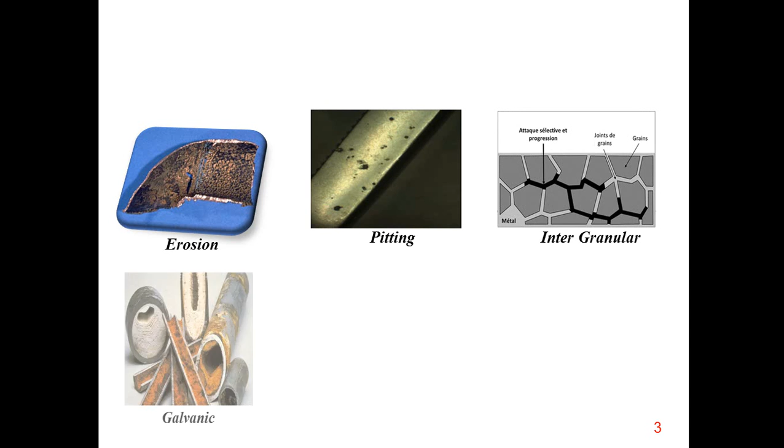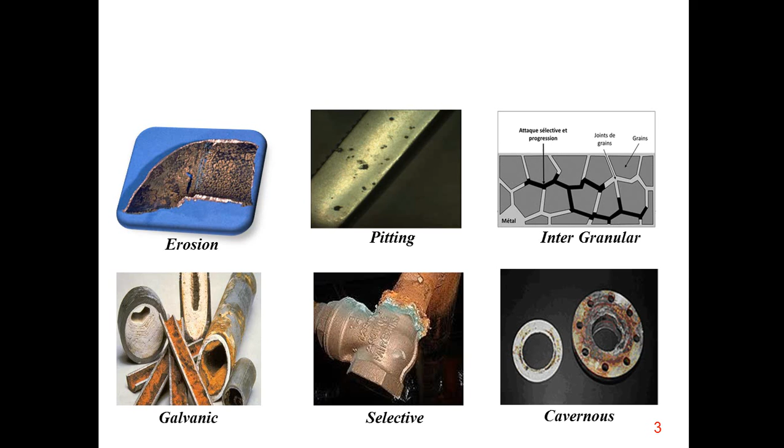Corrosion is an electrochemical process that takes place between metallic materials and environment, causing degradation of metals, which results in environment and process pollution, economic loss, and safety issues. Corrosion leads to serious problems such as changing physical appearance, mechanical properties, and resistance of materials.

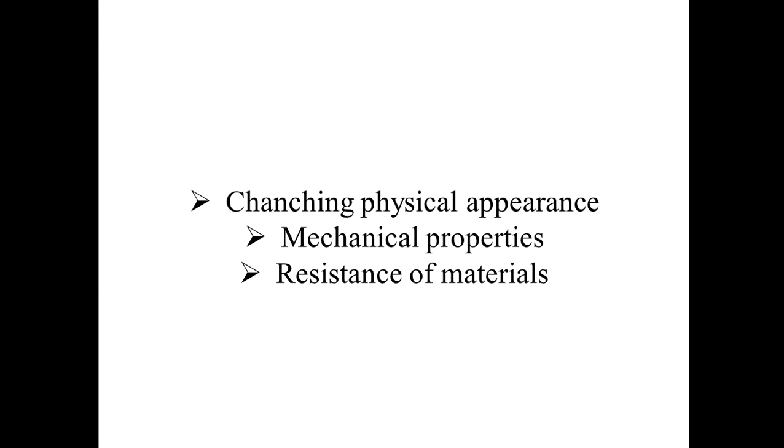One of the most affected metals by corrosion is mild steel or its alloys, which are the most important and widely used metals in various industrial and engineering applications due to their low cost, high ductility, malleability, good mechanical resistance, and easy availability.

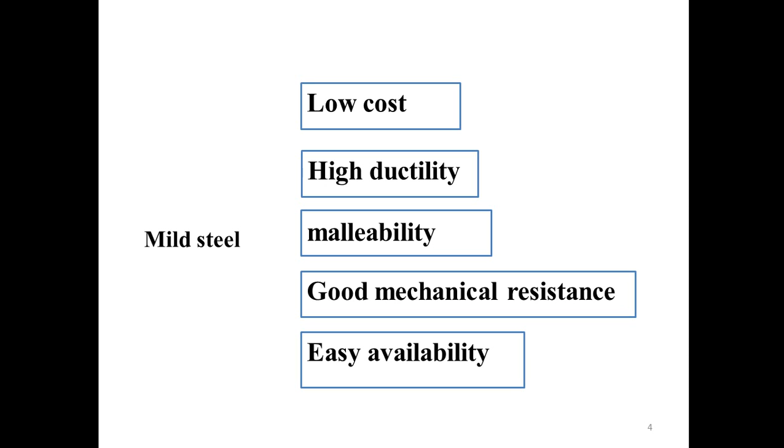Recently, corrosion protection studies have focused on the use of non-toxic and effective inhibitors, mostly called green corrosion inhibitors. Those inhibitors are generally obtained from natural products as extracts from leaves, seeds, heartwood, bark, fruits, and medicinal plants.

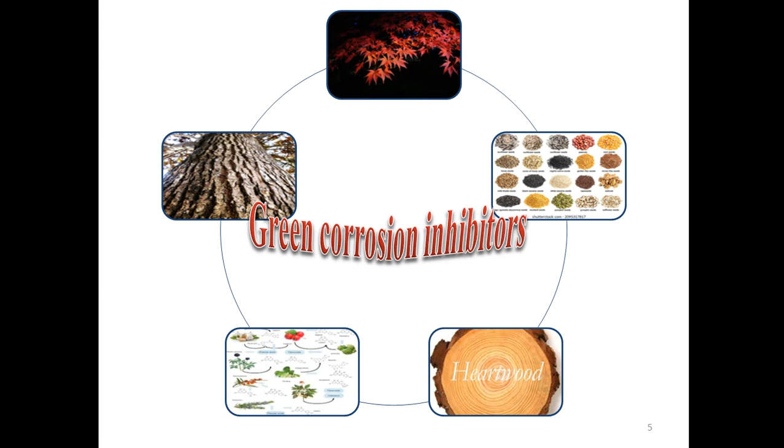As summarized above, many extracts have been applied as corrosion inhibitors for protecting metals. Most of them are local. Therefore, enrichment of local and natural compounds for this aim is very beneficial for industry.

Celtis tournefortii is a deciduous tree usually about 5 meters tall that grows in high temperature and tropical regions. The edible fruits of this tree are popular in many countries including Turkey, Ukraine, Croatia, Greece, Iraq, Iran and Azerbaijan.

The fruiting buds of Turkish Oriental hackberry are popularly known as Gardahan or Doğu Çitlembiği by the local people in Turkey.

The fruit of this plant has high nutritive properties. Its fruits and seeds contain high levels of calories, phosphorus, vitamins, and other minerals. Also, it's very rich in protein and fat compared to other fruits.

To our best knowledge, the extract of Celtis tournefortii, which is commonly available in different countries, was not studied as a natural corrosion inhibitor for mild steel protection in 1 molar HCl. Various electrochemical, microscopic techniques and contact angle measurements were used for this study.

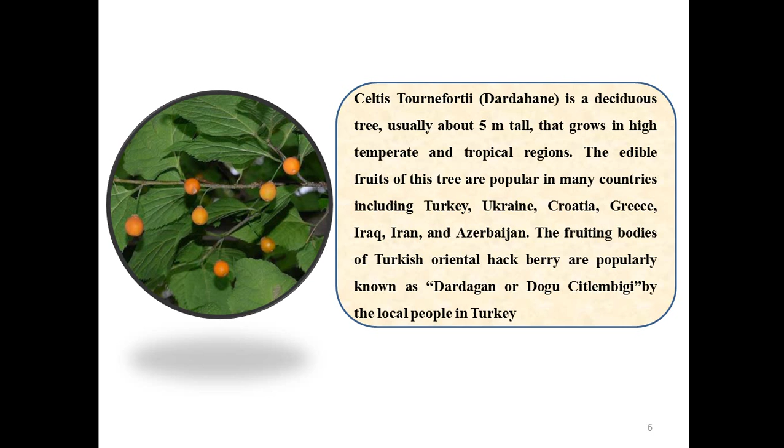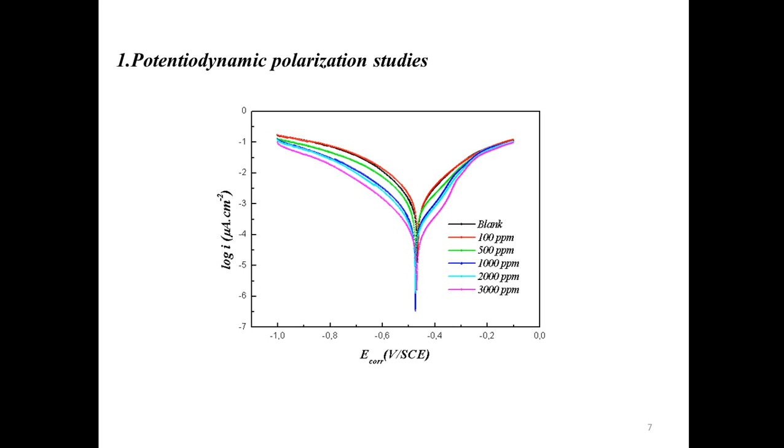The potentiodynamic polarization plots for mild steel in 1 molar HCl solution without and with addition of various concentrations of Celtis tournefortii are shown in figure 1. The different electrochemical parameters determined from the polarization curves are listed in table 1.

According to the data provided in table 1, corrosion current density decreases in the presence of inhibitor due to the blocking of the active sites of the mild steel. Increasing inhibitor concentration reduces current density.

The inhibition efficiency increases with increasing inhibitor concentration and reaches 92% at 3000 ppm of the inhibitor.

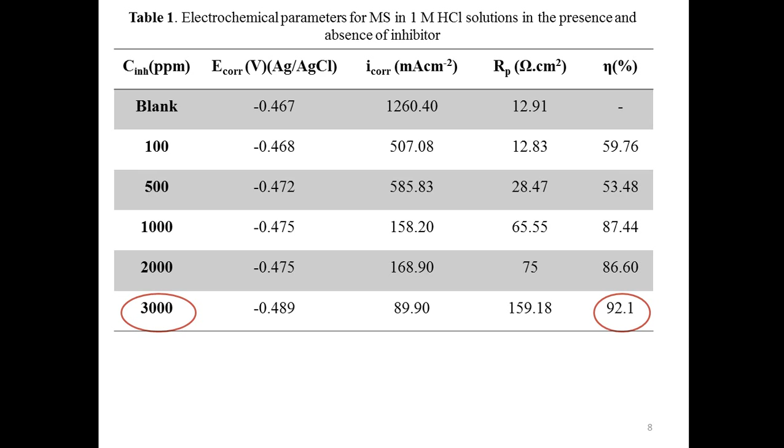Electrochemical impedance spectroscopy technique was utilized to investigate corrosion inhibition efficiency of the inhibitor. The Nyquist plots of mild steel electrodes in 1 molar HCl without and with various concentrations of Celtis tournefortii are given in figure 2.

The Nyquist plots are characterized by a capacitive loop at high frequency followed by an inductive arc at low frequencies, in the absence of inhibitor and in the presence of small inhibitor concentrations.

The capacitive loop appearing at the high frequency region shows the phenomenon related to the double electric layer. This arises from charge transfer in the corrosion process. The low frequency inductive loop shows relaxation of species from the surface and indicates unstable corrosion products at the metal surface.

The diameter of the Nyquist plots increases as the concentration of inhibitor increases, due to the adsorption of molecules on the mild steel.

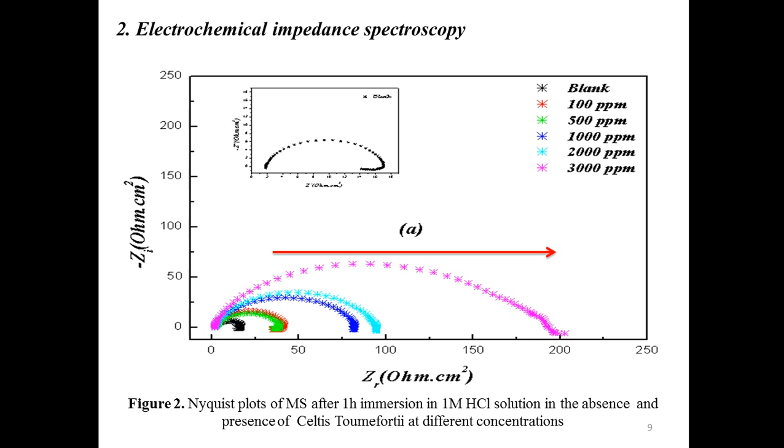The surface SEM images of the mild steel after immersion in 1 molar HCl without and with the addition of 3000 ppm of inhibitor are given in figure 3.

Without inhibitor, the surface is strongly damaged due to the excessive dissolution of mild steel. Many cracks and pits distributed over the metal are apparent.

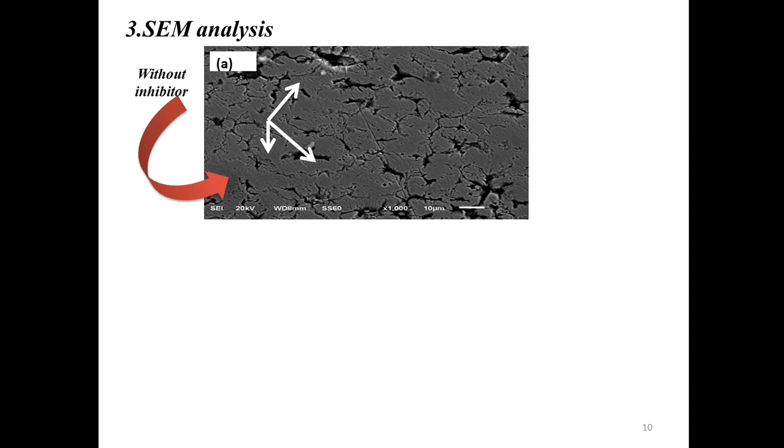When 3000 ppm of inhibitor was added to the corrosive media, the mild steel surface looks much better, and there is an inhibitor film on the mild steel surface, which reduces the dissolution of metal and provides remarkable prevention against corrosion.

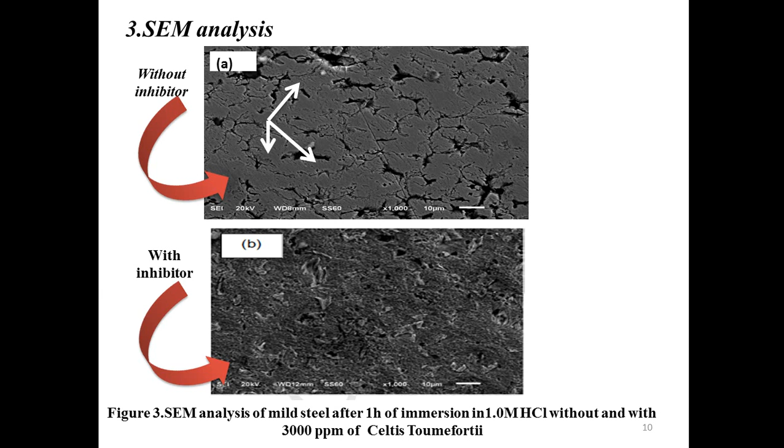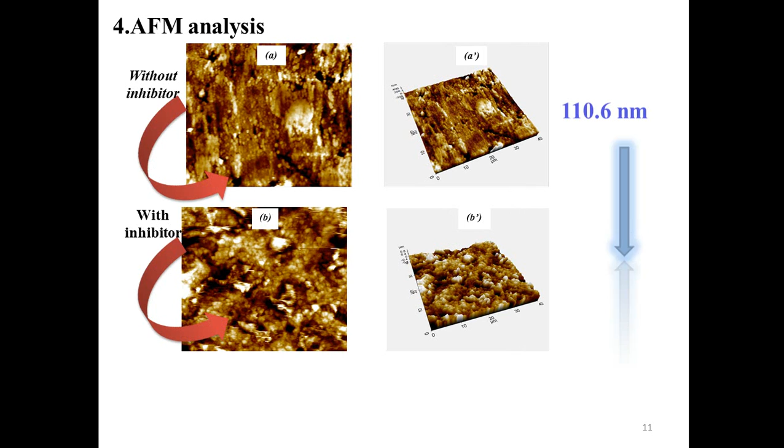Detailed AFM analysis was carried out to obtain the average roughness factor Ra. The average Ra in uninhibited 1 molar HCl was found to be 110 nanometers.

The addition of 3000 ppm to the aggressive solution reduces the Ra to 23 nanometers. The reduction in Ra can be assigned to formation of an organic film on the surface, which has a compact structure and covers pits well.

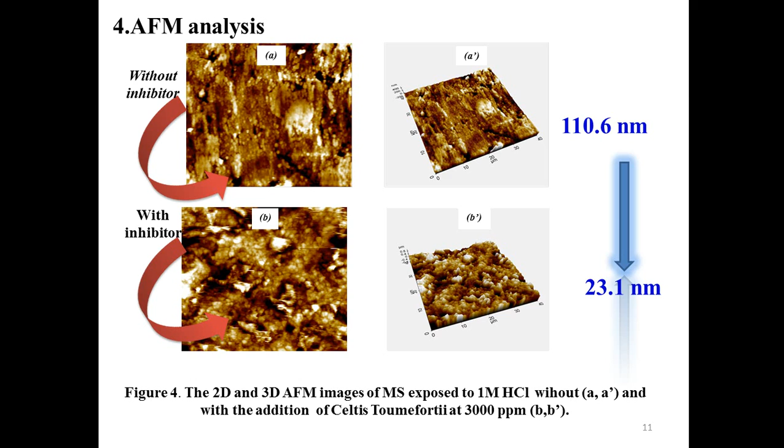Contact angle measurements can give valuable information about the surface, film formation, hydrophilic or hydrophobic character of the surface, as well as orientation of molecules at the metal solution interface.

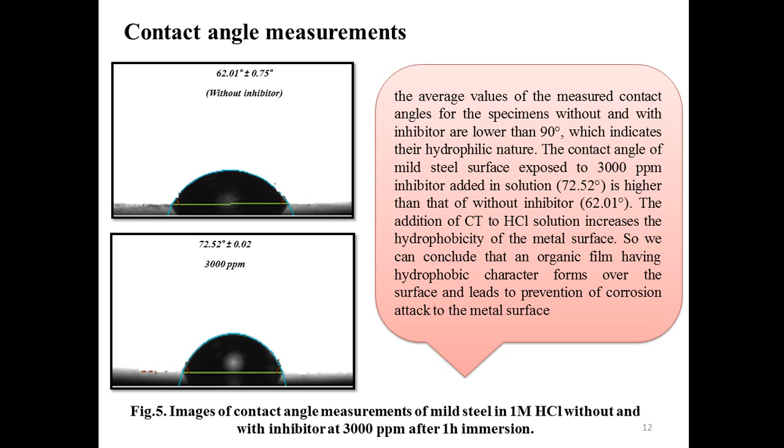The addition of inhibitor to HCl solution increases the hydrophobicity of the metal surface, so we can conclude that an organic film having a hydrophobic character forms over the surface and leads to the prevention of corrosion attack on the metal surface.

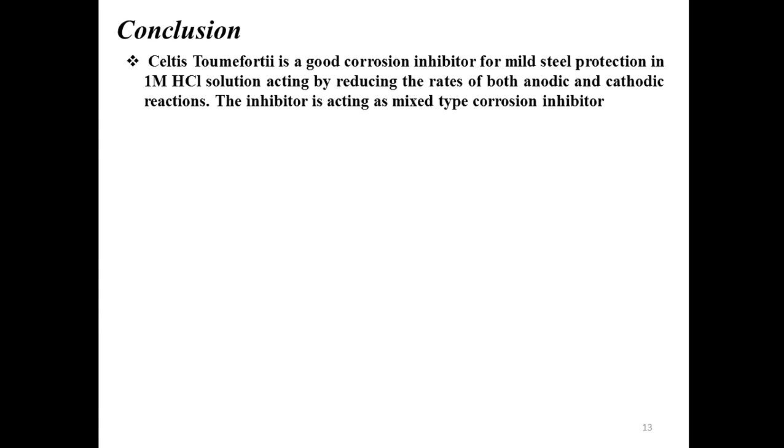Celtis tournefortii is a good corrosion inhibitor for mild steel protection in 1 molar HCl solution, acting by reducing the rates of both anodic and cathodic reactions. The inhibitor is acting as a mixed-type corrosion inhibitor.

The inhibitory efficiency of this natural compound depends on its concentration and is higher than 90% at 3000 ppm, which is sufficient for practical applications. This inhibitor should be applied at high concentrations for sufficient protection.

Surface analysis measurements are in good agreement with the electrochemical results and confirm a protective and well-distributed film over the metal surface. A significant reduction in surface roughness was observed in the inhibitor-containing solution compared with the solution without inhibitor.

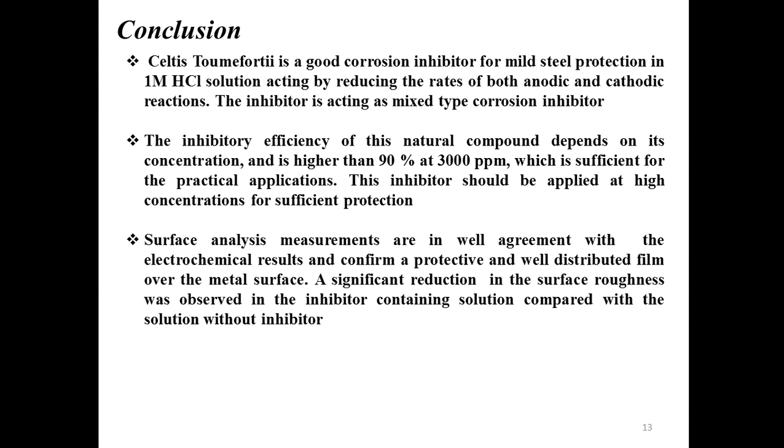The inhibitor molecules adsorb homogeneously on the metal surface and form a protective film. The outer surface of the film has a hydrophobic character.